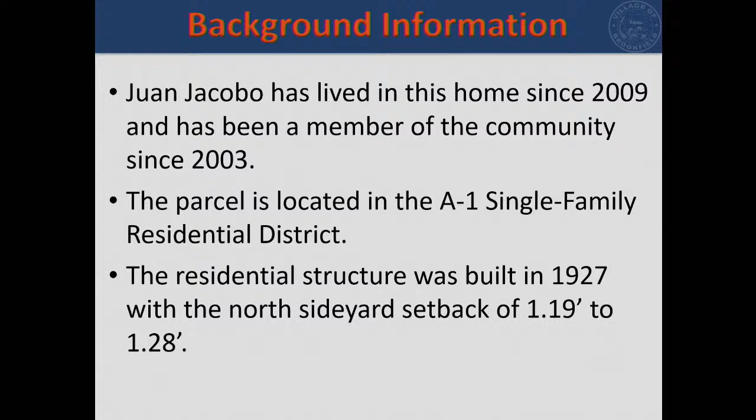Jacobo has lived in his home since 2009, and he's actually lived in the community since 2003. He attested to his interest in staying in the community and investing in the community at the Planning and Zoning Commission meeting. This is a parcel located in a single-family residential district, and the home was built in 1927 with north side yard setbacks of plus or minus 1 foot, where normally we'd be talking about a 5-foot setback for all residential districts.

So the application was made based on the space limitations that would result in building the second floor addition scrunched in, so to speak, to meet those 5-foot setbacks. The desire of Juan and his family was to seek potential zoning relief. So the second floor addition, based on the existing design of the existing home, would in fact have a drip line that encroaches on the neighboring property.

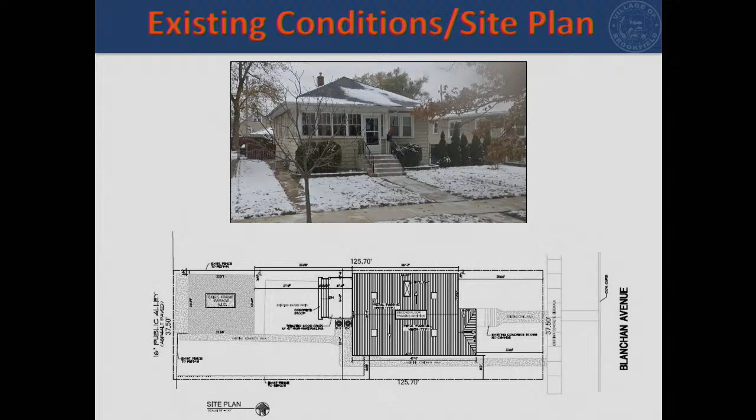In the application packet, Mr. Jacobo did in fact provide a letter of support from the neighboring property that you see in this picture, and the Planning and Zoning Commission heard this case on May 23rd.

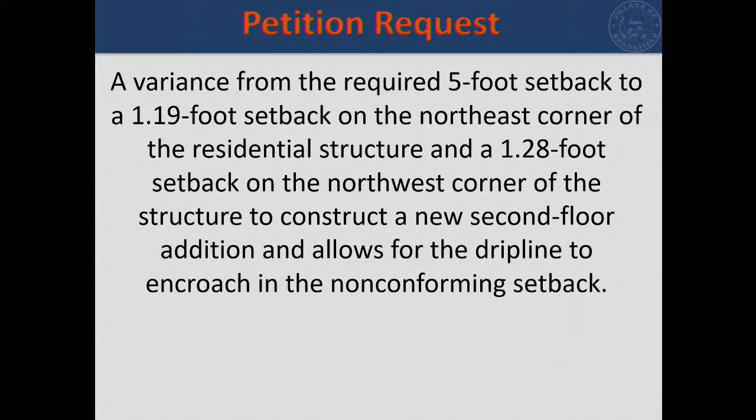So the request came forward, and as I just said, this is a request for relief from that 5-foot setback in order to build the second floor addition straight up. In their deliberations, the commissioners did note that the gutter design of that second floor addition is now in fact tighter to the building and did slightly lessen that non-conforming condition.

So the Planning and Zoning Commission issued a unanimous favorable recommendation for approval by a vote of 5 ayes and 0 nays. Thank you, Kate. Trustee Hendricks, was there anything you wanted to add? Kate covered it all. Thank you.

Do any board members have any questions or comments about the case or the recommendation from the Planning and Zoning Commission? Hearing none, the board can contemplate this, and we'll put it up for the June 24th Village Board meeting for a board vote. Thank you very much, Kate.

The next item is a presentation for the Ogden Avenue corridor improvements. By way of background, in 2020 the village applied for and was awarded funding from the Central Council of Mayors for Surface Transportation Program funds to prepare a Phase 1 project development report, a PDR, for the Ogden Avenue corridor improvements.

We went through the process with Kimley-Horn as a consultant for the Ogden Corridor Plan, and the village adopted the Energize Ogden Plan in 2022. The village was then awarded funding through federal fiscal year 2023, and we entered into an agreement with Civiltech Engineering to prepare the PDR.

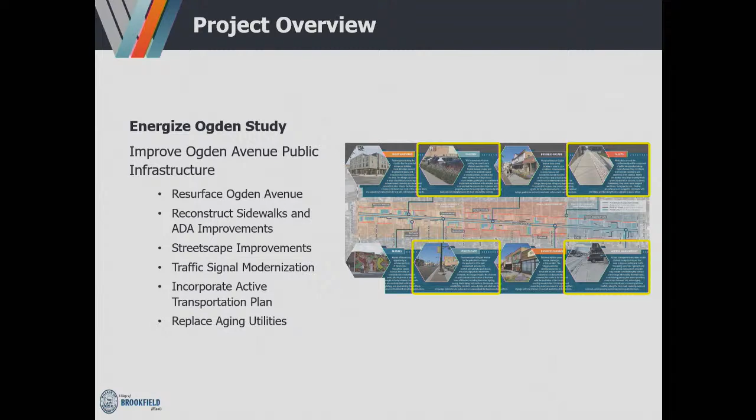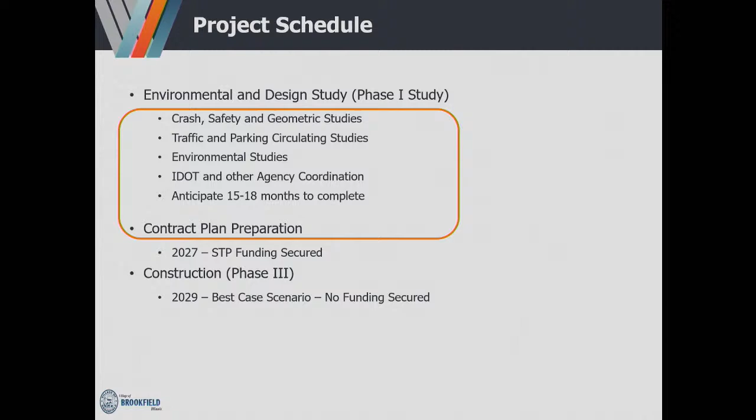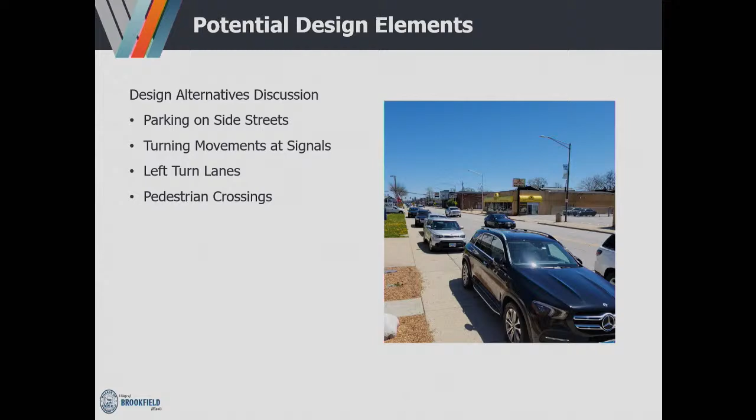So I'm here tonight to discuss just a couple of potential design elements and get some input. The first of which is parking on side streets, turning movements at signals, left turn lanes, and pedestrian crossings.

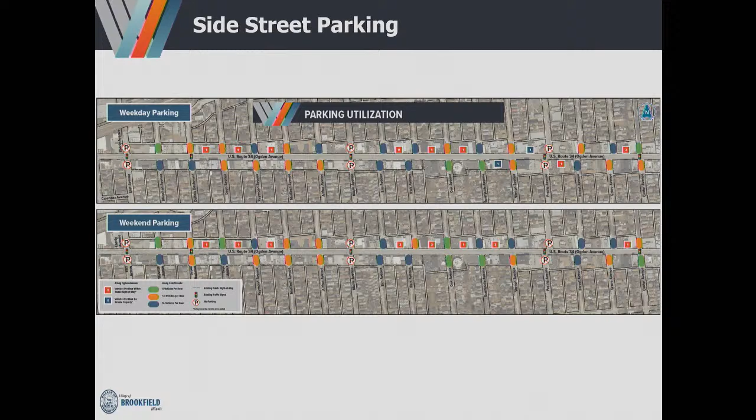So when we look at the side street parking along Ogden, this is between Ogden Avenue and the very first alley. We did a parking study to look at the number of utilized spaces out there, as well as got a lot of input at the public information meeting and public comments stating that there's not enough parking. Our parking counts did show that a lot of people are parking out there, and there's not enough parking out there.

One of the challenges when we're looking at some of these narrow corridors is the type of parking spaces to implement: angled parking versus parallel. With angled parking, you're going to have more parking spaces, but you're reducing any green space, landscaping, and streetscaping elements. With parallel, you're going to have more of that green space, but also you're reducing the number of parking spaces you can have.

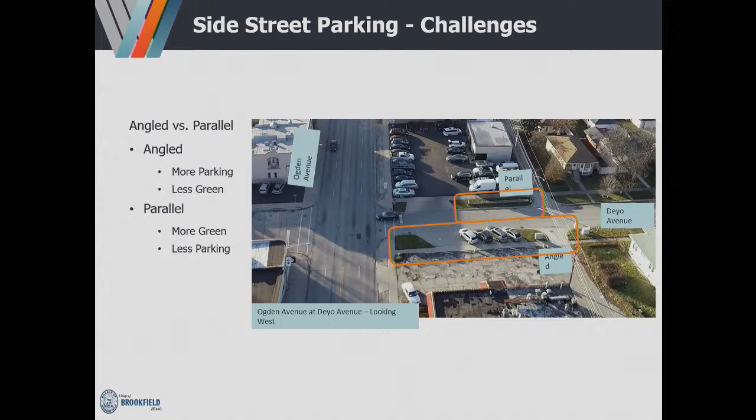Another challenge we have is the design standards that Brookfield has been using along some of these side streets with some of the newly constructed parking spaces. If we were to follow that, we'd have to seek a design variance from IDOT. Really, the biggest difference is the offset from the crosswalk. IDOT's going to require us to get 30 feet; the Brookfield standard is 20 feet. So we're maybe losing about a space or so if we were to stick to the IDOT standard.

Since this project is going through IDOT and the federal aid process, we are going to need to get state approval on this project. They do accept design exceptions and design variances, given there's enough justification for why we are not meeting their criteria.

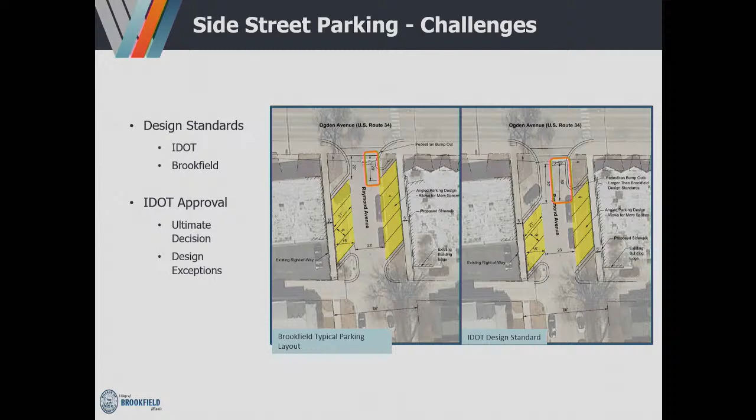So our recommendation for parking improvements is to maximize the parking on the side streets, provide angled parking where it's appropriate, and use parallel parking as a secondary option. At the roadways that have signalized intersections along Ogden, we do not want to provide angled parking. You get some higher speeds as cars are approaching Ogden to try to catch a green, and that could cause a safety conflict with the backing up vehicle. We would recommend evaluating the parallel parking or maintaining the existing configuration that's out there.

We also recommend approaching IDOT, including all of the parking improvements in the federal aid study. That way, when we apply for funding for construction, they can be included in the 75% or so of funding, federal funding for the project.

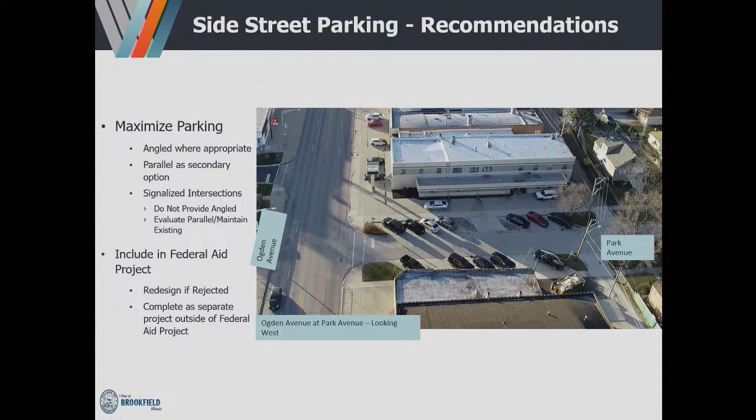Do you have any questions or thoughts on the parking? Maybe we should go through these one by one, all the different elements, before we move on to the turning movements and signals. So how does the board feel about the recommendations related to the parking?

I'm in favor of the angled parking. I like the recommendation. It goes along with when they held it at the library—that was one of the things that I talked to somebody about, and I'm totally in favor of what they're offering there. Yeah, makes sense to me as well.

So you said the 20 to 30-foot difference between Brookfield Design Standards and IDOT—is that from the actual Ogden Avenue to the first spot? Yeah, that's from the crosswalk, the edge of the crosswalk to the tip of the spot, yes.

Okay, I'm just curious, because I think you just mentioned it—I live off Raymond in that first block, and when you're trying to turn onto one of the side streets there, and someone's trying to back up, it can get a little backed up depending on the time of day. So I'm not sure if the 30 feet would be helpful to kind of reduce that.

I don't know if that's something you saw in your study, if there was backup along Ogden. I don't believe so. We did our study, we flew a drone every hour to count the number of spaces that were used. So we do have the drone video, we could go back and look at that.

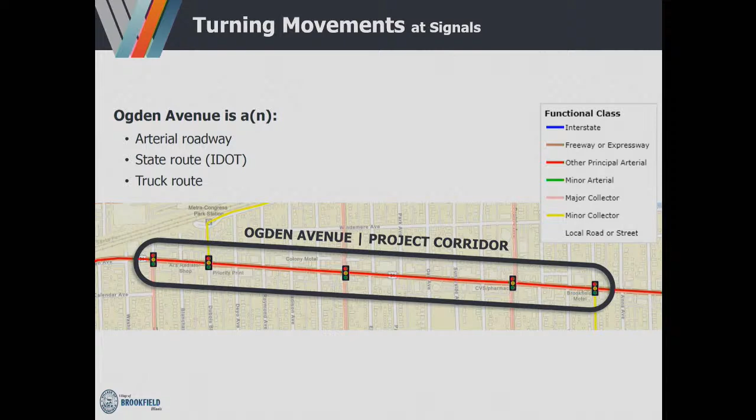Again, this is another topic that IDOT will entertain a design variance for, and it's likely that we will have to approach them for some design variances.

Also, some other things we want to consider with our truck turning movements and everything else is the active transportation plan. I know that there's a mention of bump outs and curb extensions at Maple and Ogden. That really isn't feasible with the current configuration of the road. However, there are bike routes along Dubois, Maple, and Prairie, and we are going to look to incorporate those into our improvements as we continue on.

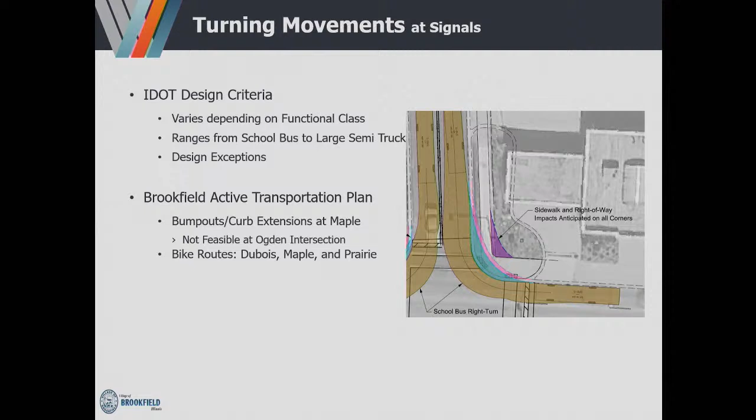So each of these next slides, they're kind of all telling the same story. We've outlined the turning movements of where the trucks would be to meet the IDOT criteria. Essentially, the blue and purple show how much widening would need to be done to meet the IDOT criteria. On each of these corners, it's quite a bit of widening to accommodate all these vehicles, and even on some intersections, that widening would go into some existing buildings. So I don't think I need to go through each of these one by one, but the information's here. If we have any questions, I can flip to it.

A general question—on many of these, the commercial signage is in the way.

I'm not sure what jurisdiction we have on some of these. I think a couple of these are in other municipalities. One of these corners is in LaGrange, I think one is in Lyons. How does that all work with this?

We will be coordinating with both those municipalities as we continue on this project. With federal aid projects, you need to have logical termini, and for this project we've identified it as the village limits. Those are collector roadways on each end, so that makes sense for a logical termini. However, we do have to study the intersections themselves, so we can't just go up to the very limit and then forget about the rest of it.

So what happens, like on East Avenue and Ogden, I think we're encroaching into where the Village of LaGrange sign is. So when it comes to something like that, can they say no? Is it up to us to pay to move it, or?

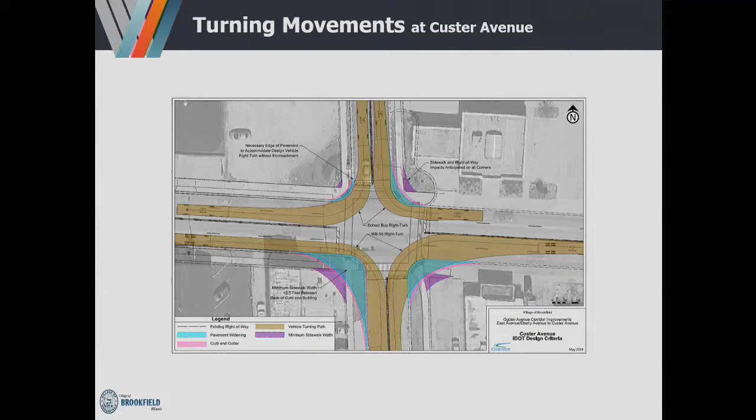Derek did a good job of summarizing. Theoretically, the board's two options are: we could say we want to try and meet IDOT standards, which would mean we'd have to attempt to acquire all this right-of-way and make it that route. Or the other option is to try and minimize the impact the best we can and make customized decisions at each intersection. I think Trustee Ketchmark was correct that East Avenue and Eberly is the most prominent problem. I agree Custer is less of an issue, but again, it's approaching IDOT and trying to come up with the most customized plan to work with what we've got without major impact or major land acquisition. It's not just land acquisition, it's changing these businesses and some buildings and things like that.

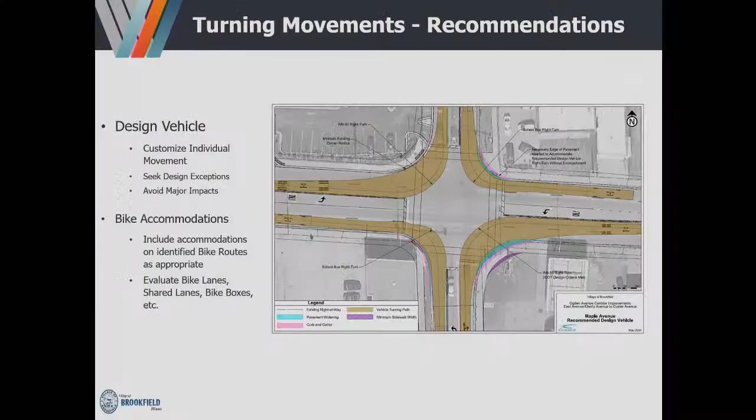Could you go to the Prairie one, because that one seemed the most unique? Yes, the Prairie one is very unique because of the way the intersection's laid out. It's a split phase, so the northbound and southbound have separate green times. That's why the turning movement kind of loops into the other direction, because they have the green time to themselves and more space. So you're not recommending reconfiguring that intersection, but this is just showing the turning rate? Yes. I believe early on it was thought to maybe look into it, but since then I believe a business is going in on that corner.

So is there a consensus to go with the recommendation for customizing the movement at each intersection, seeking some design exceptions and avoiding some major impacts or land acquisition issues? I'm in favor of that. There seems to be a clear consensus from the board on that.

Though I think if we can improve some of these spaces by just maybe shifting over somebody's sign, we should at least look into that. I think that's what I was taking from staff, that if possible, there'd be recommendations for customized solutions individually. Yes, will come back with customized solutions.

Can we go to Eberly too? That is by far the most challenging. This is the existing curb here, correct, Jim? Yes. To get the new curb in to meet IDOT standards, you're coming back to here - I know this is light, but this is the right of way, so I don't have the dimensions, 10 by 10, 15 by 15, but then to maintain the sidewalk, this is just a line 7 foot back of this proposed curb.

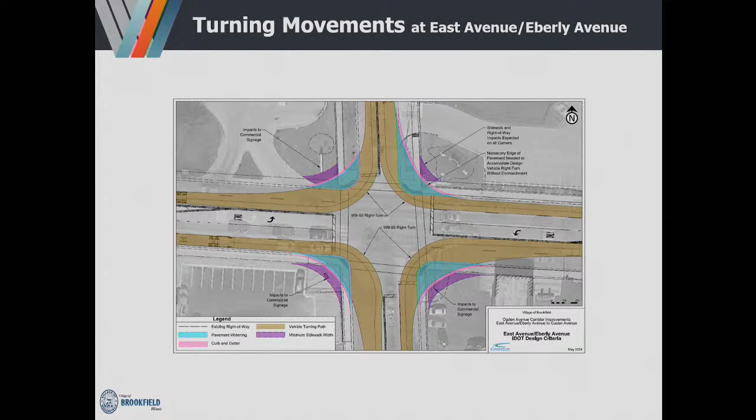We're just looking for a general approach. Is the board saying no, we want to meet the IDOT requirements on all intersections? That gives us a little different approach with the business owners. No, I don't think that's what we're hearing from the board, but we do look at some even incremental improvements or changes that could make some improvements without major land acquisition type things. And that's the guidance we're looking for tonight, I know it's a small step, but that's the guidance we're looking for.

From a design point of view, do you look at the north and south sides separately? Because I travel through here nonstop every day. So the traffic from Ogden onto Eberly or from Eberly onto Ogden is pretty key, whereas on the other side, on the north side, when you're turning into the body shop or 7-Eleven, you're not seeing the big truck traffic. Correct, so we would customize each corner, each turning movement individually. So it could be school buses on the north leg, semis on the south leg.

Thanks, I'm sorry, go ahead Justin. Just a quick question - on the turn radiuses we're talking buses, semis, etc., but from a safety point of view, we were just talking about safety on other aspects. If by pulling back the sidewalk, because bump outs are meant to be safer for pedestrians etc., by pulling that back, is there a history of increased speed from regular vehicles trying to make those turns? Is that a danger issue?

It depends on the crosswalk location, definitely. And with our improvements, we would be looking at where the crosswalk is, making sure it's not too far set back, so the cars aren't making that turn or starting to accelerate as they approach the crosswalk. That's definitely one of our considerations.

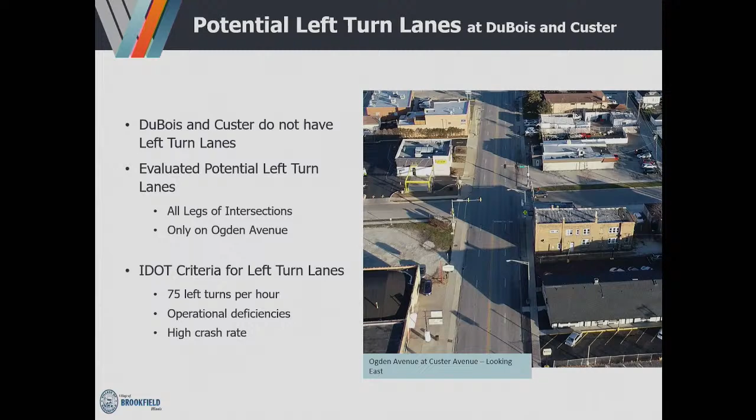First, I'll talk about Du Bois. At that intersection, there's only a maximum of 15 left turns during the peak hour, the heavily most traveled hour during the day, well less than 75. Our operational analysis, looking at levels of service and delay through the intersection, results in really no operational benefit. If the car's not there when the arrow turns green, he's pretty much waiting through the cycle for it to turn yellow and clear out so he can turn.

Crashes are also very low at this intersection. Over the 5-year period, there were only 3 crashes: 1 left turn and 2 side swipes, which have been understood to be cars getting out of the left lane into the right lane and hitting a car. No injuries for any of those crashes.

Adding left turn lanes would also require restriping Du Bois, which could potentially remove parking. And widening along Ogden reduces the sidewalks up to the building face to about 5 feet, which just isn't acceptable. So our recommendation at Du Bois is to maintain the existing lane configuration.

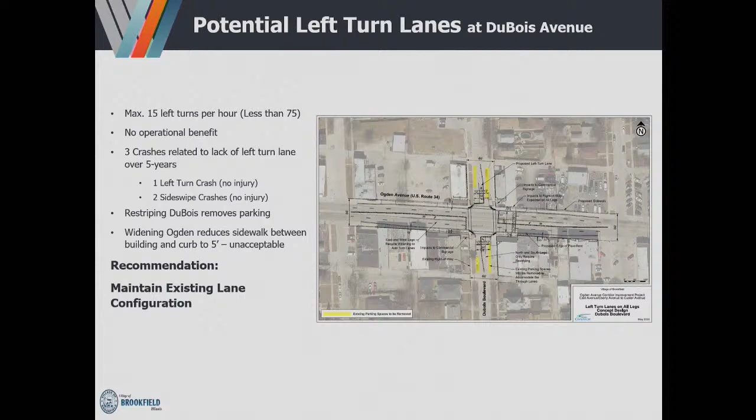Does the board have questions or comments regarding that recommendation? That seems pretty straightforward. The 15 turns per hour is a max, nowhere near the typical requirement.

And reducing the sidewalk to that length, when we talk about making it more pedestrian friendly, a 5-foot sidewalk along Ogden Avenue just doesn't make sense. So I think this was due diligence in terms of looking at the options, but is there a clear consensus from the board that we would maintain the existing lane configuration? Yes. Okay, all right.

Looking next at Custer, pretty similar situation. The turning volume is a little higher at 55, however that is still less than the 75 vehicles per hour. Again, no operational benefit. Here there are only 2 crashes, 1 left turn and 1 side swipe, again no injury crashes.

Again, removal of parking, and then the widening along Ogden would bring that sidewalk down to 7 feet, which is acceptable. However, that's not very pedestrian friendly.

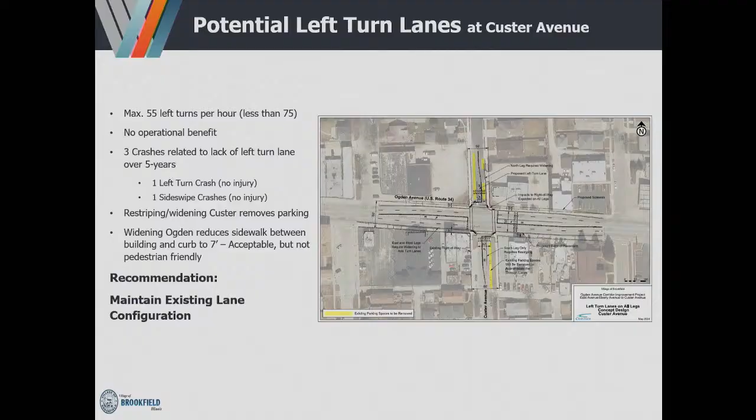Does the board agree—it's a cost-benefit analysis here. The 7-foot sidewalk is a little better and more acceptable, but removing parking has its own benefit. Do we agree with the recommendation at Custer to maintain the existing lane configuration? Yes. Yes. Yes.

Before we move on, in terms of the left turn, are we considering any changes to westbound traffic at Ogden and Prairie? We really don't have a left turn lane there. We kind of have it striped and people will pull out into that island.

Yes, our recommendation there was to sign that to prohibit the left turn. Sign it, no left turn. Right now it's just striped, so there's nothing prohibiting you from making that turn.

When really the eastbound has the left turn lane and there's that conflict zone you can get into. So we would recommend signing that no left turn. So no other options we're looking at there?

I mean, doing a no left turn there—that intersection has substantial traffic. It does, yes, but that left turn volume was very low during our counts, so it would be impacting a very low number of vehicles. Is that something we can do on our own without an IDOT variation or anything like that?

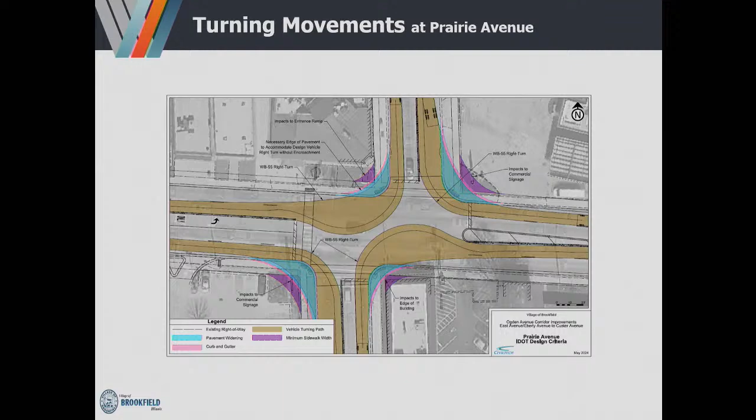How does the board agree with the no left turn concept there? Yep. I'm not sure what the other options are. I think there's driver etiquette that you go through at that intersection, as to how far you pull up.

The other option would be to look at widening to the east to add a westbound left turn lane, and then changing the cycles to have a protected-only left turn, which would increase the delay at that intersection quite a bit.

Yeah, unfortunately, I don't think we can count on etiquette. I think we have to make it clear with signage and regulations. Is there consensus on the board about that? Yep. Okay, I think there's a clear enough consensus from the board.

Okay, you want to talk about pedestrian crossings next? Yeah, pedestrian crossings. As we start to look at making this corridor more pedestrian friendly, we're looking at the pedestrian safety and crossings that are out there. Currently, there are crossings, or there will be crossings, at all 5 of the signalized intersections.

And at Raymond, there is an existing uncontrolled crossing—just a painted crosswalk out there now, and I believe there's one sign for the school crossing. Between Maple and Prairie is almost a 2,000-foot stretch with no crosswalks or anything out there.

So we want to look at both Raymond and Oak Avenue as locations to improve crossing, and add one at Oak.

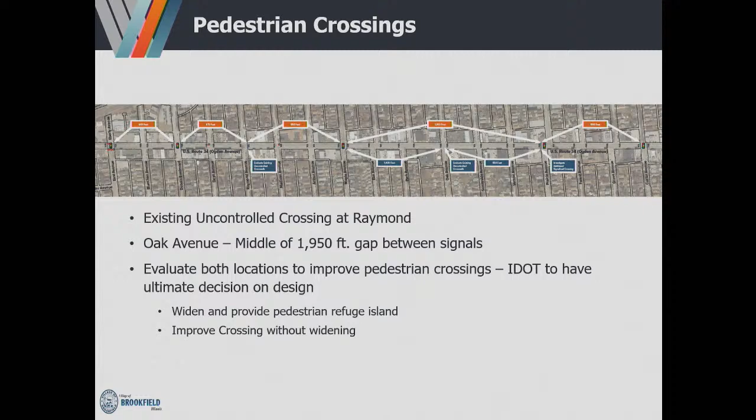I want to mention again that the ultimate decision is going to be up to IDOT. So we can approach them with this great design and say we support this, and they could always come back and say it doesn't meet whatever criteria—you're crossing 30,000 vehicles per day, they may request it be taken out. But having the board's support on any improvement can also sway their thoughts on the design.

Is there an example of a pedestrian refuge island on Ogden Avenue with a similar width to what we have? Not on Ogden, no. Up on 31st Street, just west of Brookfield at the Salt Creek Trail, there's a crossing with a pedestrian median island, about 12 feet wide, and it has rectangular rapid flashing beacons as well.

So the thought is to consider asking IDOT for permission to put a pedestrian refuge island on Ogden with the width we have. But that doesn't seem very likely to be approved, does it? Well, IDOT has a set of guidelines for these uncontrolled crossings, and given the amount of volume, it requires a site-specific design—there's nothing standard that can be implemented.

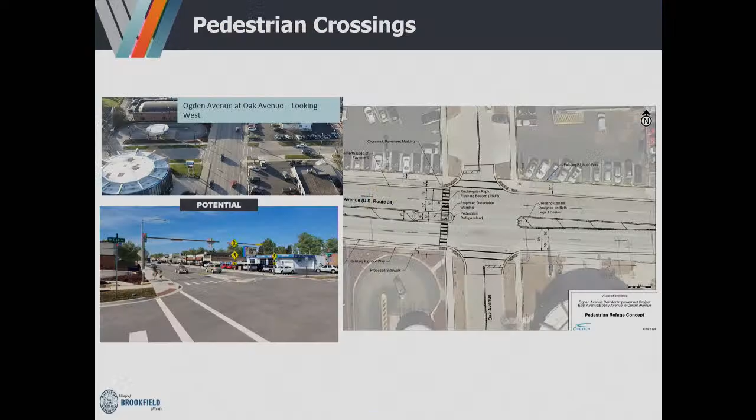Raymond, okay. Yeah, and with our designs on both Raymond and Oak, we're going to be looking at the impacts. The crossing could be on one side or the other, or both. So it's something we can also evaluate as we get into more detailed analysis of the impacts.

But at Raymond, there is an existing crossing. It is painted out there, and it is signed for the school crossing, I believe. So that is the main difference between Raymond and Oak.

And some things we discussed with the left turn lane, because we'd potentially be widening Ogden Avenue, we'd have to look at the parking spaces as well and see if that has any impacts with the setback, or seek another design variance there.

Did this come up at all? More discussion on this versus Oak in terms of the Raymond crossing, or did it generate any additional public comment? There wasn't a whole lot of public comment in general for one versus the other. There was a handful in support of it. Others referenced other locations with similar crossings that they didn't like. It was kind of a mixed bag of comments we got.

What impact on the right-of-way would this intersection have? Would it bring the sidewalk back to 7 feet also here? I think for the most part it'd be 10. I think there's one building on the east side.

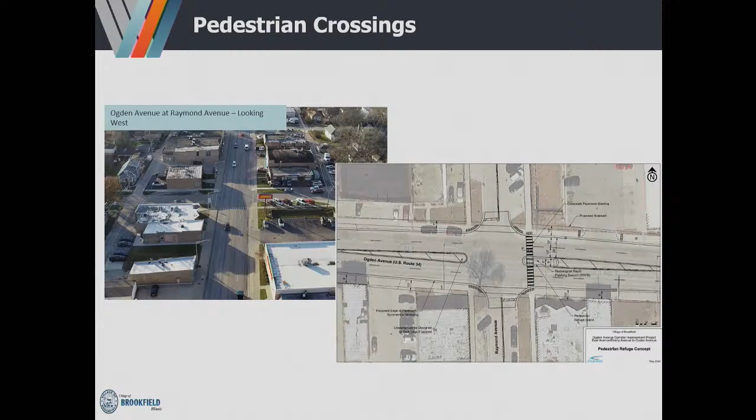IDOT generally is more okay with improving an existing crossing than introducing a new crossing. So there's a good chance they'll be in favor of improving Raymond.

Okay, great. All right, I believe that's all that I have.

General question for you, and maybe this is something we'll talk about going forward, but we talked about the parking you had seen right off Raymond there. What about some of the areas — if you look at the Oak pedestrian crossing just west of that, you're gonna be at like Elm-ish, where for Enterprise and the body shop and all that — that's 100% you pulling off Ogden and parking in front of the building. Is there any intent to do anything with those kind of areas?

That is something we are still going to be discussing, like how to approach those properties. I know some of those business owners were at the public meeting, and they were very adamant that they did not want to lose the parking in front of their building.

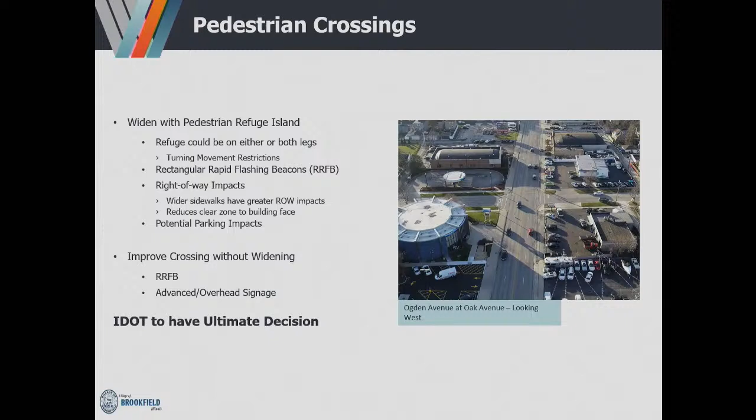So what's the next step look like for you and then for the board? When will we hear back, or what will we hear back, or when will we need to provide additional input? Over the next month or two, we're going to be scheduling coordination meetings with the outside agencies — IDOT, Cook County, LaGrange — just to get their support and identify, to get the project started, basically from the processing standpoint.

Then I think we'll start working on our design and really detailing the impacts. I don't know exactly when we'd come next, but I'd anticipate in the next 2-3 months we'll have our meetings with IDOT and then come back to the board and report on what input we've received from them, and also from LaGrange, Lyons, and Cook County.

Okay, well, thank you very much for all your work to this point. Thank you to staff for their cooperation. Thank you to all the residents that participated in the public comment portion and the business owners, and the comments here tonight. Each of us has a different perspective and use of that area, so it's all helpful — thank you, we appreciate it.

If you can come up to the microphone — I saw you frantically run out to try and verify something. I talked to Detective Jelinek, who runs our crossing guards. He said we have not had a crossing guard at Raymond and Ogden for about the last 5 years. So I fear that may be something you need to be aware of.

Yeah, I kind of thought that, because I remember the former crossing guard was one of the people that talked about combat pay, because it's a challenging job. But I appreciate you checking on that — no problem. Thanks.